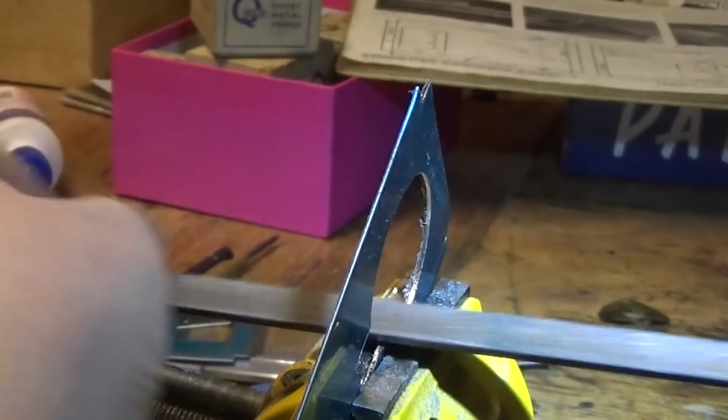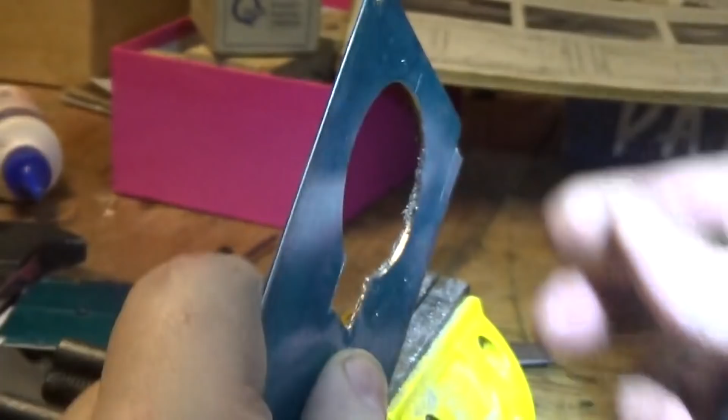So when that's down nearly close, we'll grab a half round file and I'm just going to run round there, nice and close to the line, keeping the work pretty well supported up close to where we're filing.

And we must be getting somewhere near pretty close. So look, it just wants a little bit more in a couple of spots. Very easy to take too much out

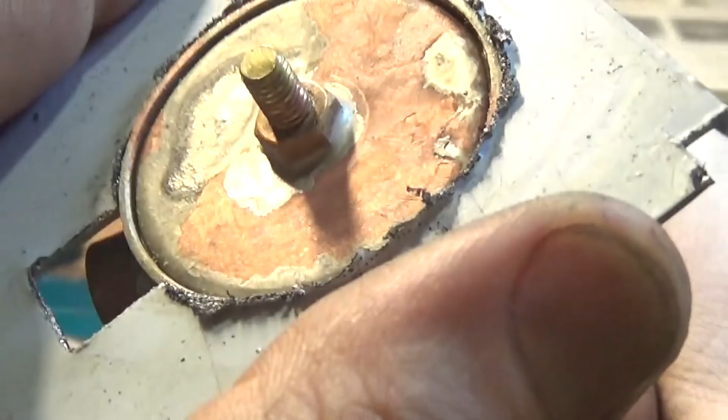and discover that you've got a nasty gap around here. If you discover you've got a 10-thou gap and you can see daylight through it in places, you're probably going to find it's not the end of the world, because the brass tube that fits over here butts up against it and that'll hide some of it. But that's getting close, it nearly fits on there. I'm just going to mark where it needs a little bit more and keep going.

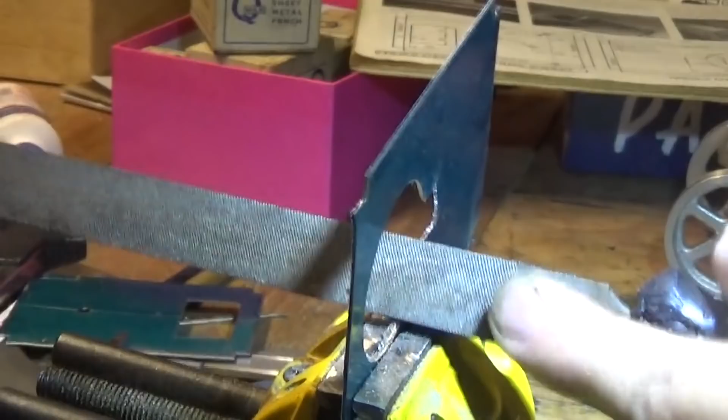This is fun. I enjoy filing once you get into it. It's very easy to say, oh, I really can't be bothered doing that. I'd much rather go and sit and watch TV. And the reality is probably you should if you've got that mindset. But once you get started on a job like this, it doesn't take a lot to get it right.

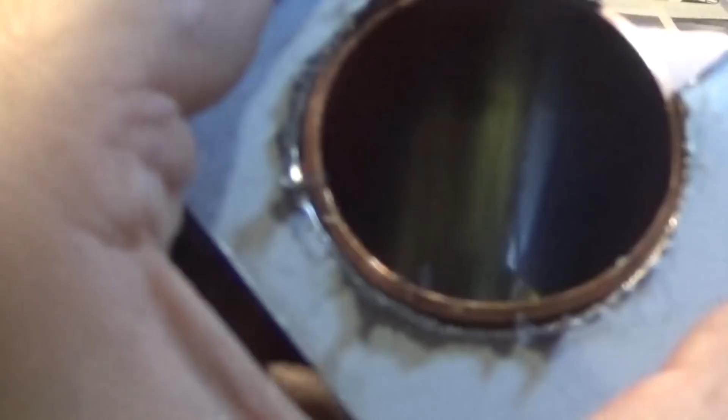Rather than lift that traction engine up all the time, I'm just going to use another piece of tube that I've got here. And that's pretty sweet, except that it's not quite cleaned up here in one corner.

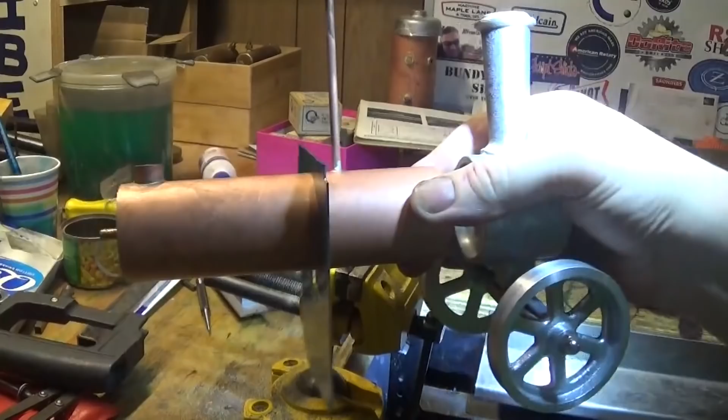I think we've got a flat spot, and that's probably all it's going to take. Yeah, but look, that's probably not too bad. That goes through there, still touching somewhere. And this fits on here like this, somewhere here. And the other one goes on the back.

So, next job really is to fold these up and give them a clean up.

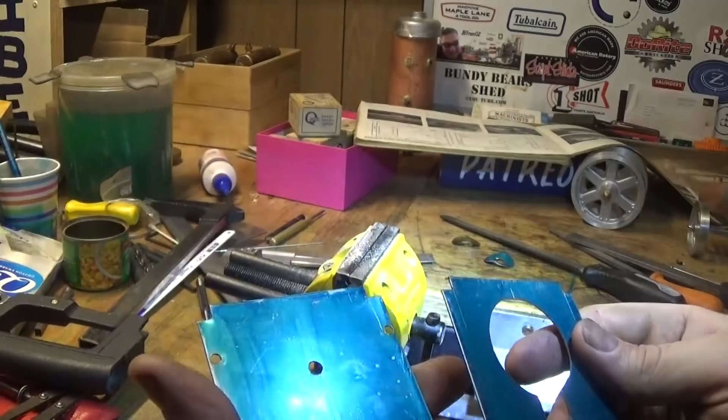So I'm first to admit that bending sheet metal is really my weakness, and I have a pan brake with movable fingers, all those sort of things. This is too close to the edge really to bend anything in that. You can tidy them up afterwards. I haven't done that with this one yet. But you can't really bend this close to the edge with it.

So I've just done these in the vise. I've just held this in the vise and I've bent it over and I've tapped it across with a piece of brass bar so that it bends down nice.

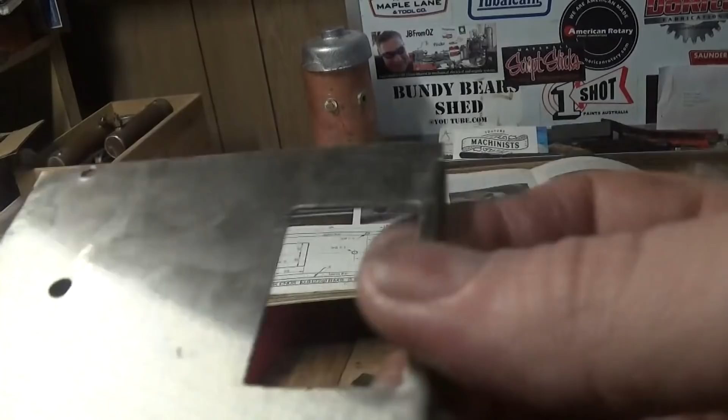Next job is to bend the other one. So really we need a piece of brass bar that fits in there nicely that we can use as a jaw to bend it around. If you've got a pair of vice grips with a set of long jaws, that's probably the best tool for this sort of work. But I don't, so

I'm going to go over there in the dark in the torchlight again. I've got a jury-rigged light and it's not really good for filming. And I'm going to try and bend these other two up. Sheet metal work isn't my strong point, so I think we'll do alright. And they'll tidy up. We can sort of give them a tap and clean them up and get somewhere near.

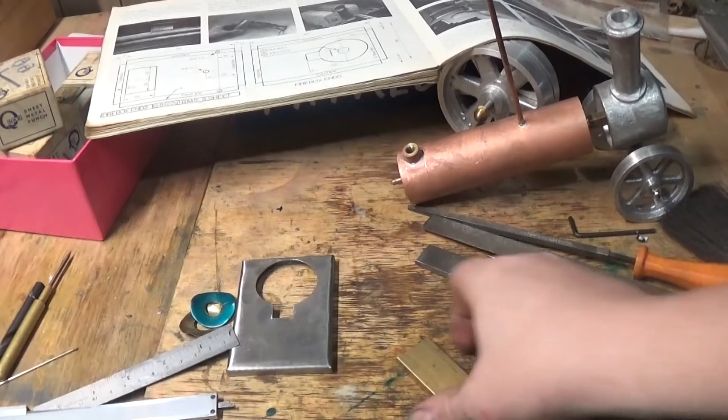So in the end I caved and I cut a piece of stock. This is about all I had. I did have a pretty good look around. I wanted a bit of steel, something a bit cheaper than this. But I only had to cut 5mm off the end of it. It was an offcut.

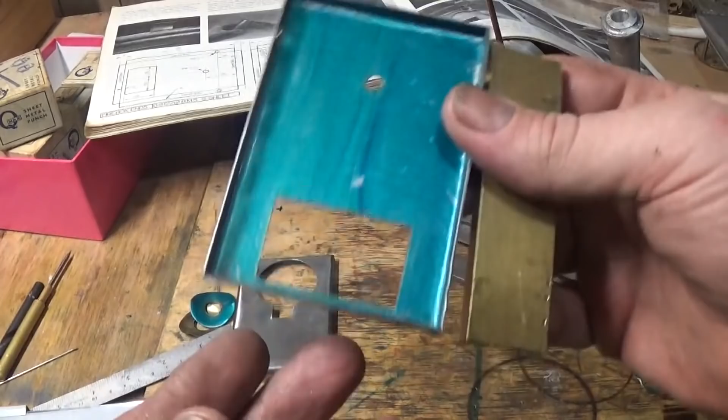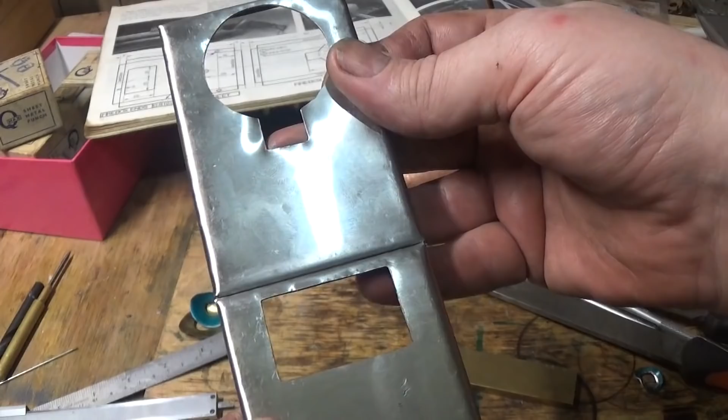And I set this up in the vise and just bent them over. So that's what we've got. That one and that one. They're even somewhere near the right size or the same size, which I'm really pleased about. If we line them up here, that hole's probably somewhere near in the centre of the big one.

They're marked up a bit and I'm not real happy about that, but a coat of heat-proof paint on these won't hurt. Probably they're going to get a file up and a clean up first, just to take all the dents off. So I went back with my trusty brass hammer and knocked most of the dents out. There's still a few marks in there, but with another hour maybe on that, these will polish out if I wanted to do that.

I'm thinking this is probably going to look nice with the contrast black, and that's probably what I'm going to do, is paint them black, because they will turn blue as they get hot. So black might be a bit more longer lasting.

Anyway, we've got two plates. This one goes on the back and this one goes on the front. And this one fits that way around nicely. Actually that way around nicely. And that's a pretty good fit. This one goes on here with a nut.

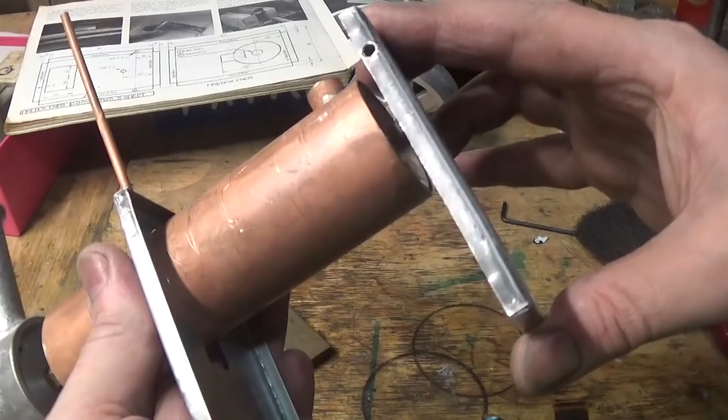And we're starting to see how that looks. This wrapper goes around here. It's got a double fold at the bottom and it goes right round. It's got a row of vent holes through the side and through the top, and another hole for this piece here. And this tube that fits on here holds it all together. It's also got a hole through here for the axle. So we're starting to look like a little traction engine. Pretty pleased about that.

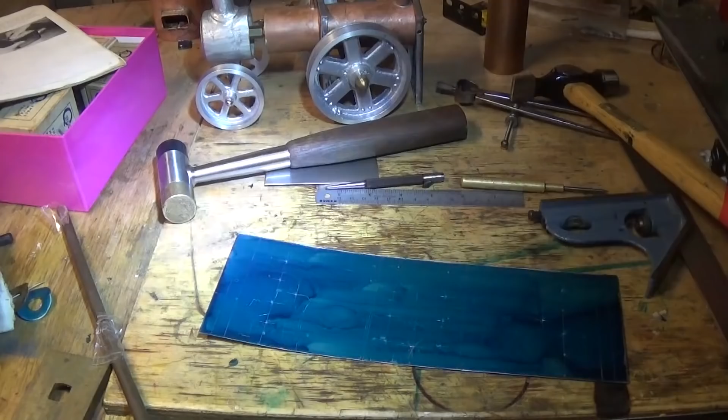Next bit is to make a wrapper. So the next job really is to mark out this piece of tin. This goes around the wrapper, and if we have a look at what we've got here already, we've got this piece on here with the cutout for the bush, and we've got this one that bolts on the back.

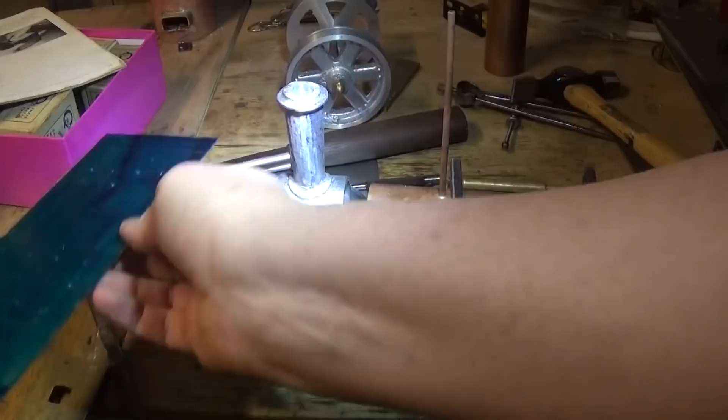Now there's a strip of metal that's 96mm by 284 that goes between those two plates, so if we move that up there as far as it'll go, that should nicely fit between there and there. If it doesn't, we might have to put a washer on the back. That's not a big deal.

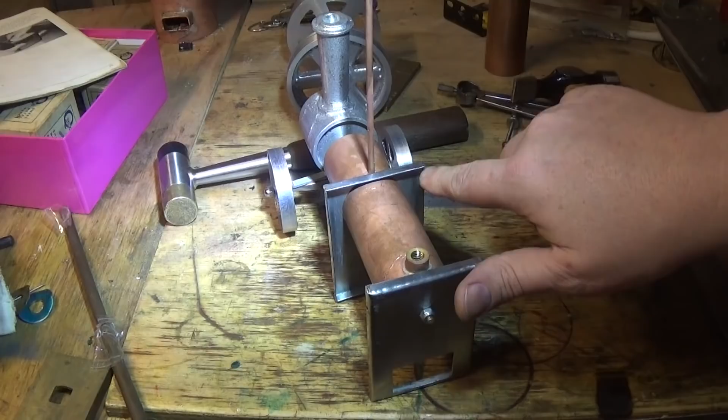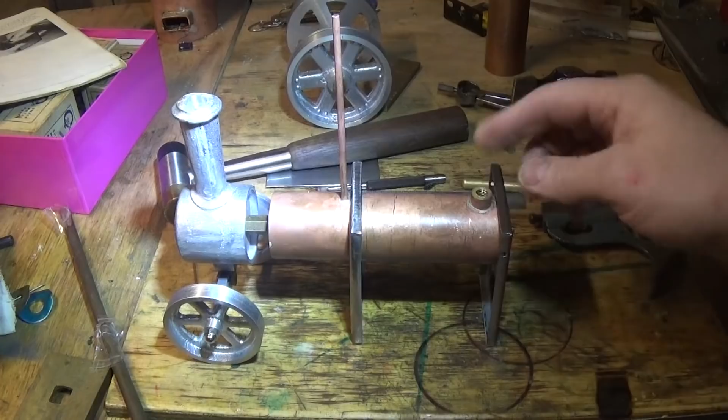This however has to bend and fit in behind this fold, so that's a bit critical. The other thing, it's got to have a hole to fit this bush, and we may have got this bush the right distance from the end. There's every chance that we haven't.

So the first thing to do, I guess, would be to check and make sure that this will go in here, and put a washer on it if it doesn't, and then measure this distance here and make sure that we get a hole that's right. But you've got a few millimeters play around this hole, so we're going to be somewhere near.

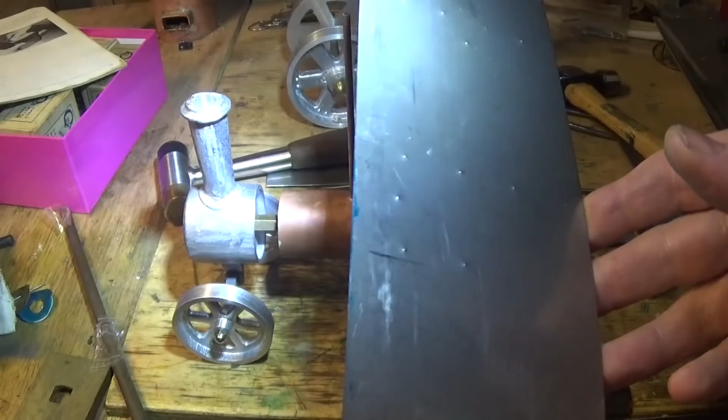This folds up this way, and there's two holes here for the axle that go through here, and there's 4 nice vent holes that go here on each side, and 6 vent holes in the top, and 2 holes to mount the engine. So they're 4mm. Good idea not to get them mixed up and drill these out too big, or we'll need another piece of tin. This is stainless steel, so that's going to be really nice.

I've just marked this from each end, so it's the same on each end. They're 9mm, 9mm, and then this one up here. There's a measurement here on the drawing to check at 63mm. So I've remarked these so that we do get a slightly narrower bend across the top. But apart from that, this all should work. That's why we've got a double line there. We'll bend on the inside.

This one here needs to be 16mm, and we're just going to punch that in nice and neat and trim.

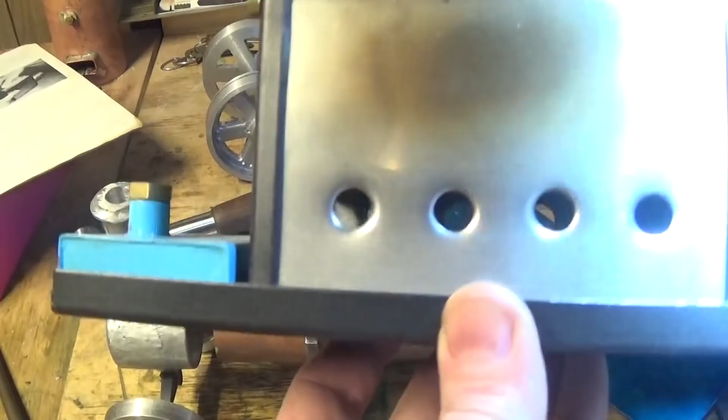When I built the last engine, I made this, which is a doming tool or a beveling tool to make the nice dished holes along the side of the smoke box. It was used to make these, no sharp corners, which I think are quite smart.

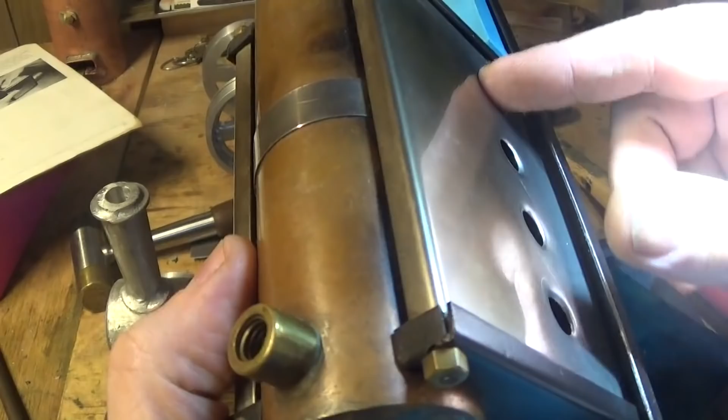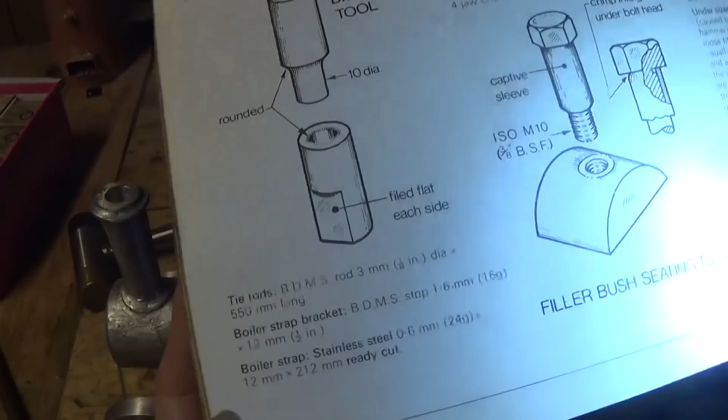So we're going to do the same again, and there are instructions in the book, in the teacher notes on page 54, for making one of those. This simple punching tool can be turned on the lathe and is used to give an interesting dished appearance to the edge of the air holes.

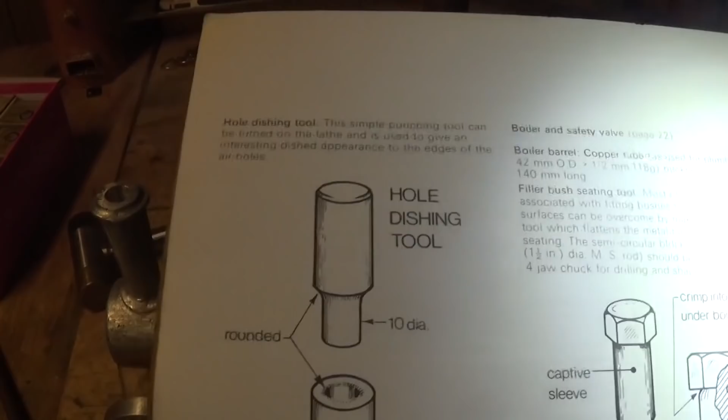But just little touches like that are what make this a really nice model.

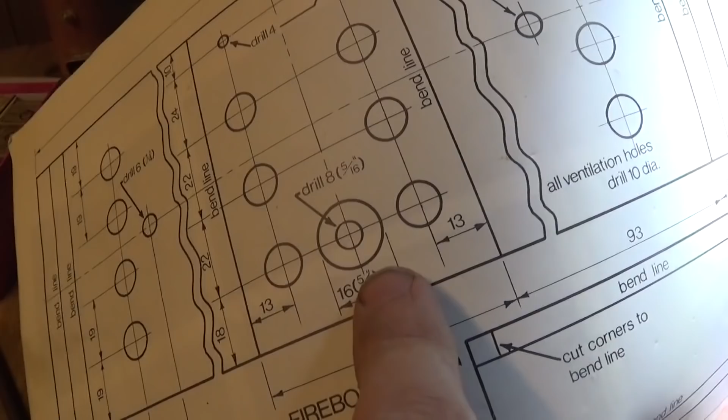So anyway, next job is to drill a lot of holes. We've got all these at 10. This one's at 6 for the axle, or 1/4 inch for the axle material, and this one each side. This one here we're going to punch out to 16mm or so, about that. These two are 4mm to mount the engine, and the rest are all 10mm.

I'm going to spend some time at the drill press now and get them drilled without too many interruptions so I don't get them mixed up.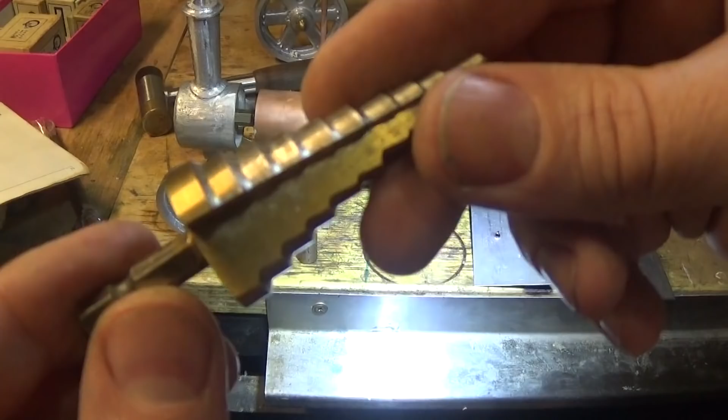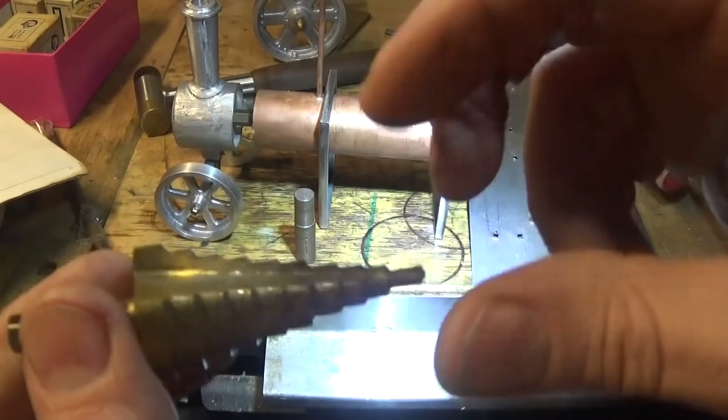I'm putting most of these holes in with this step drill, or Unibit, I think it's probably the trade name, but it's a step drill. This is good in sheet metal because it cuts really nice round holes. An ordinary drill bit won't.

So if you've got one, I've drilled them all to the first step from this side. We've got the holes there for the vent holes and the axle holes, and then we've got the vent holes here, and we've got the engine bolt down holes, and we've got a hole here for the bush, and the other axle hole and the 4 vent holes.

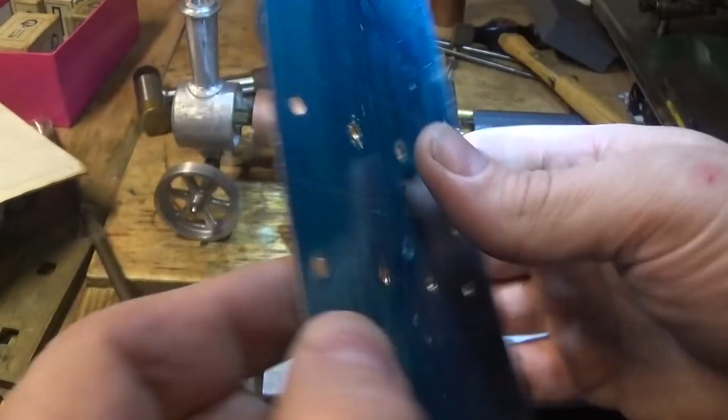So the problem with this is that it leaves a bit of a burr on this side, and you can clean it up, and I've carefully cleaned these up, which is the engine bolt down holes, and they're to size, so a 4mm bolt will be just nice in them, or 5/32 or whatever you're going to find.

I'm going to continue drilling from the other side, which is the face side, carefully. These ones here only go out to the next step, which is 1/4 inch on this.

There, and then that's going to be plenty good enough for axle holes. And then these go to the one after, which is basically 10mm or 3/8. So I'm going to finish them, but that's what you get to end up with there, and that's why I'm going to run them in from one step from each side, and then we should not get too much of this burr on the other side of the sheet.

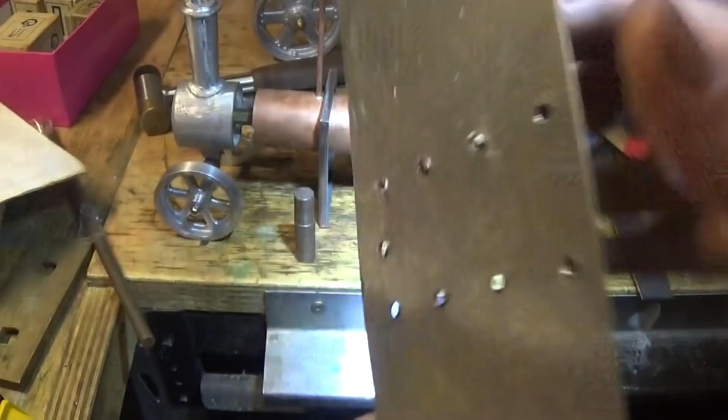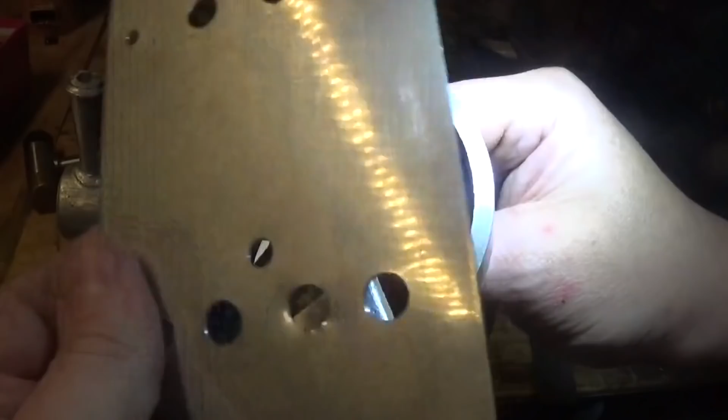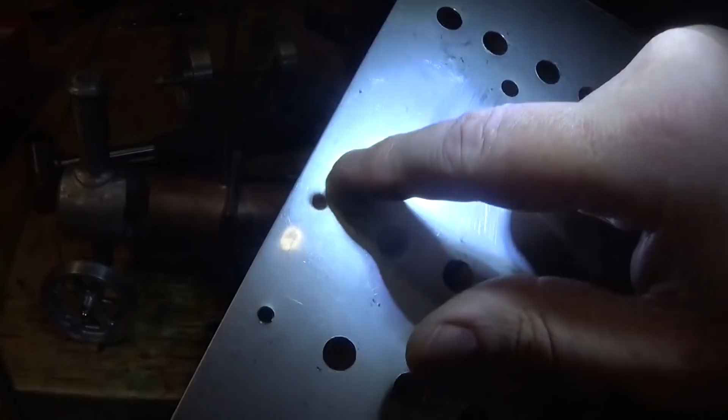So there we go. That's all the holes, the vent holes, 6 in the top and 4 at each end. The hole for the bush, which goes there, and the axle holes, which are nice fitting on there. And the 2 holes here that the little engine bolts on. So there we go, that's pretty neat.

This is the top side that we're going to basically use as the cover on the outside. So it's got to be bent this way, and these ones here will be first, and then these bends each end, and then we'll bend these ones in the middle. But before we do that, we want to dish all these holes nicely.

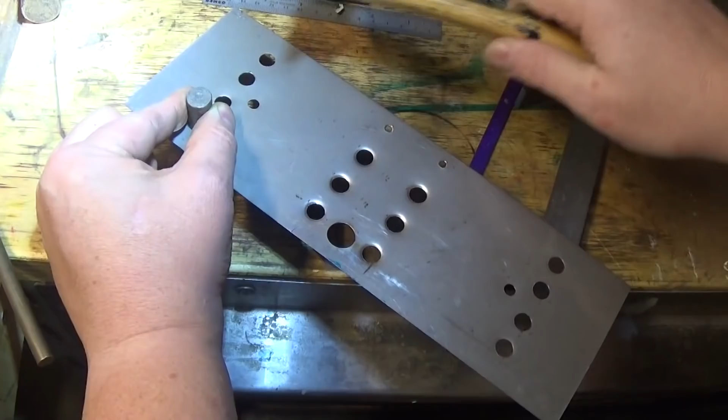Even though it's supposed to sit in the hole, what you're going to find is that it's just going to slip through, because this is stainless steel and it takes a little bit of banging to put that nice raised look on the inside there, and the dish on the outside. Just hold that nice and secure, and hit it until it...